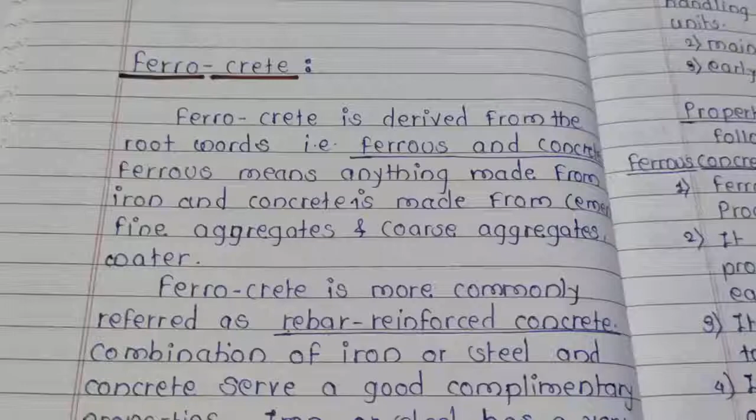Ferrocrete is derived from the root words ferrous and concrete. Ferrous means anything made from iron, and concrete is made from cement, fine aggregates, coarse aggregates and water.

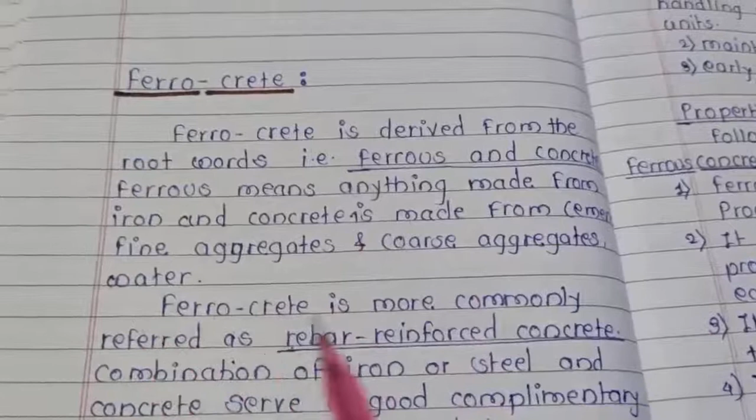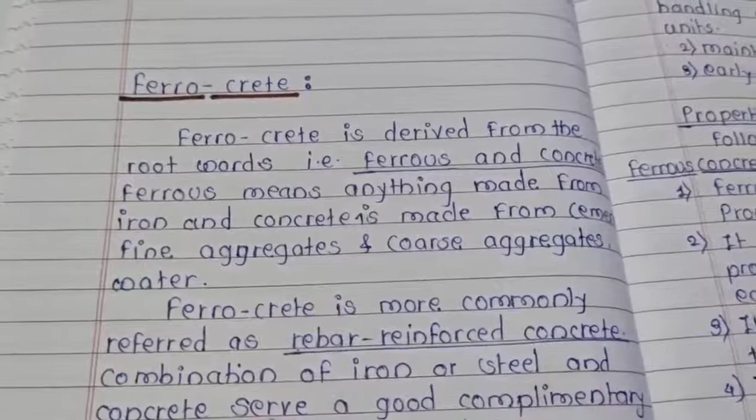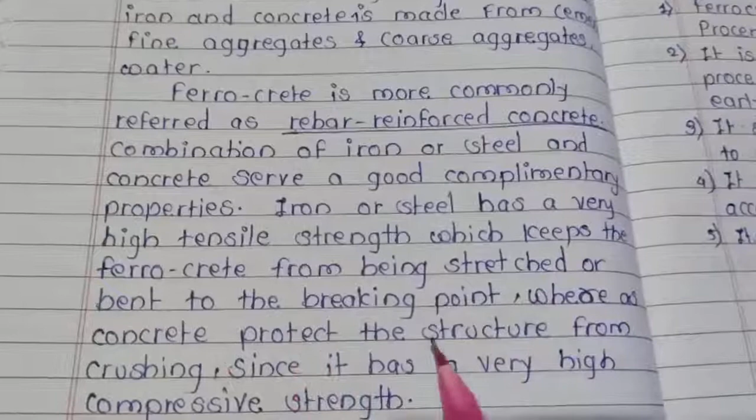Ferrocrete is more commonly referred to as rebar reinforced concrete. The combination of iron or steel and concrete serves good complementary properties. Iron or steel has a very high tensile strength, which keeps the ferrocrete from being stretched or bent to the breaking point, whereas concrete protects the structure from crushing since it has a very high compressive strength.

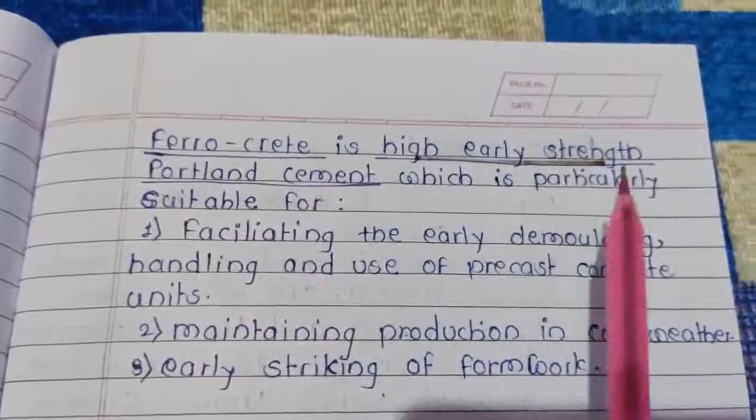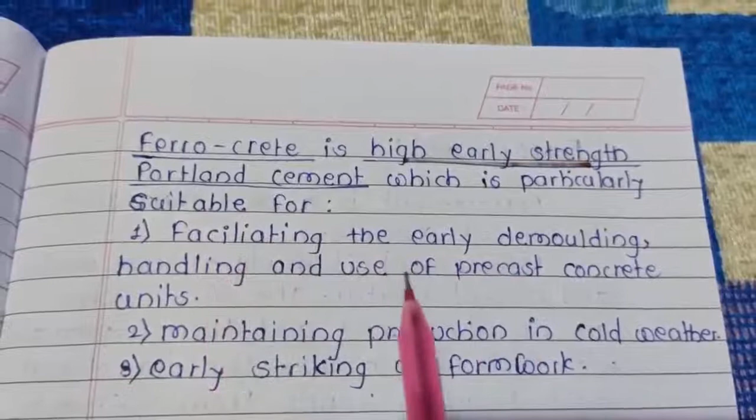Ferrocrete is high early strength Portland cement, which is particularly suitable for facilitating the early demolding, handling and use of precast concrete units, maintaining production in cold weather, and early striking of formwork.

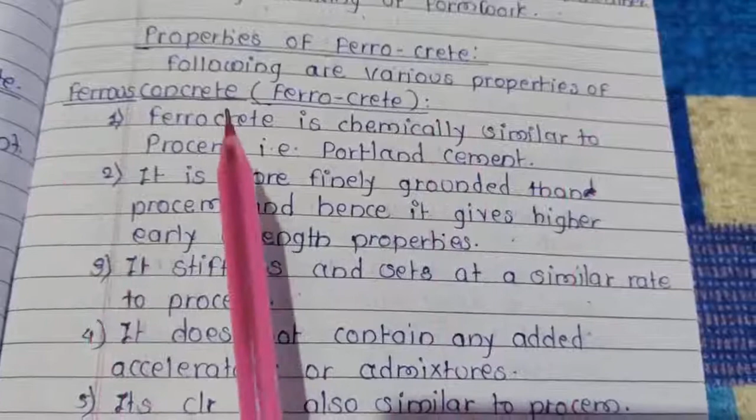Properties of ferrocrete. Following are various properties of ferrous concrete, meaning ferrocrete.

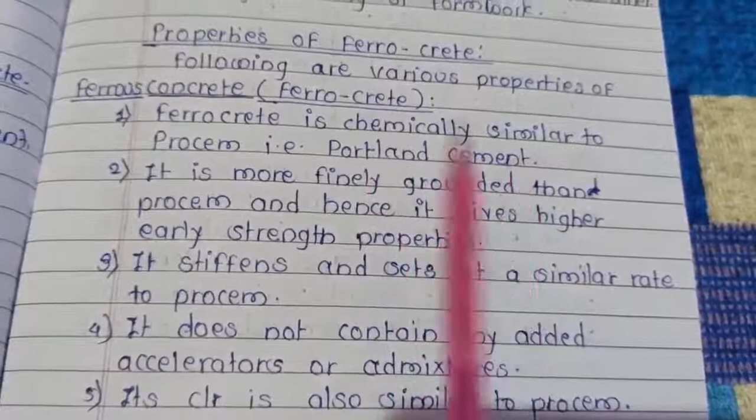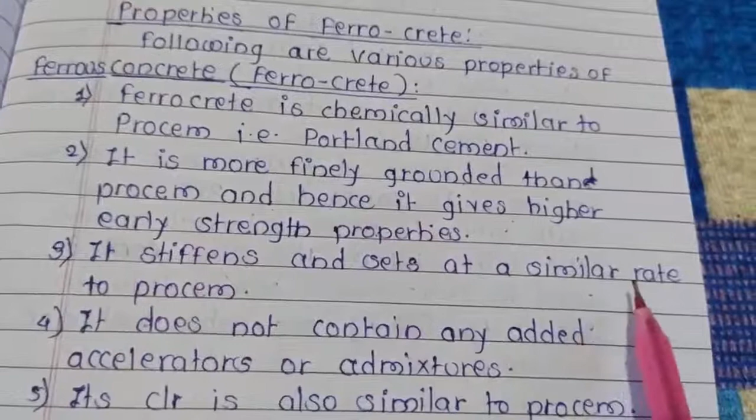Ferrocrete is chemically similar to Portland cement. It is more finely ground than Portland cement and hence gives higher early strength properties. It stiffens and sets at a similar rate to Portland cement. It does not contain any added accelerators or admixtures. Its color is also similar to Portland cement.

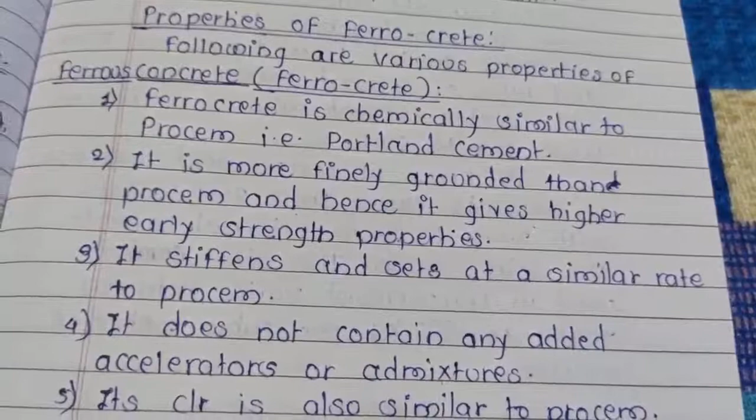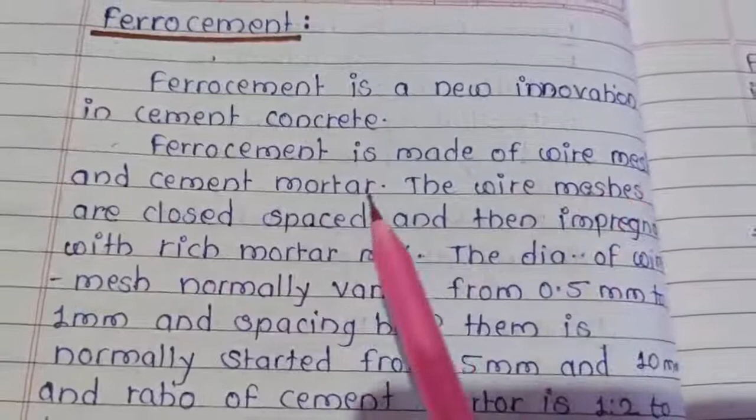Ferrocement is a new innovation in cement concrete. Ferrocement is made of wire meshes and cement mortar. The wire meshes are closely spaced and then impregnated with a rich mortar mix.

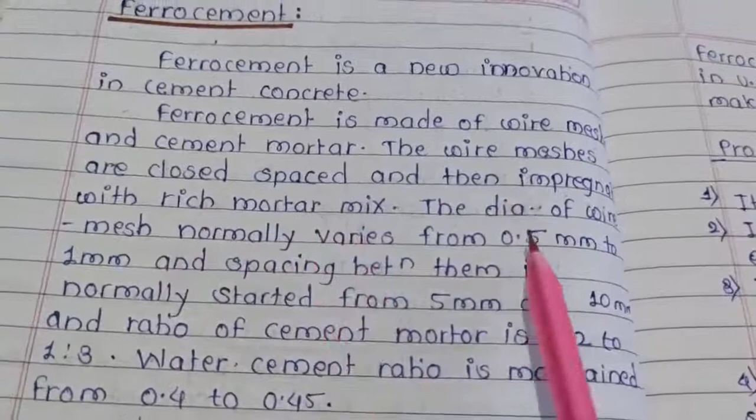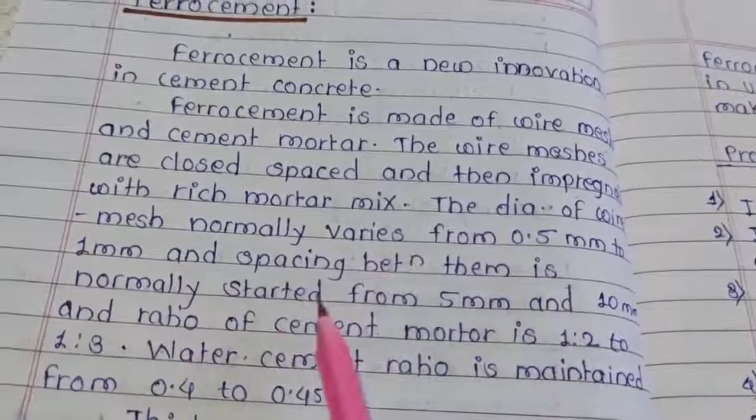The diameter of a wire mesh normally varies from 0.5 mm to 1 mm, and spacing between them normally starts from 5 mm to 10 mm. The ratio of cement mortar is 1:2 to 1:3. Water cement ratio is maintained from 0.4 to 0.45.

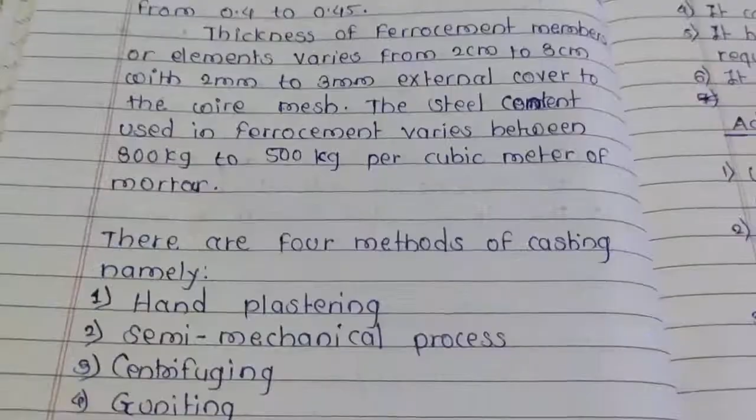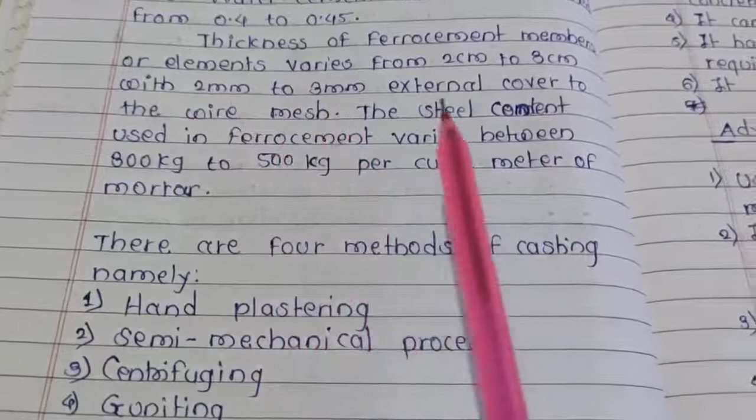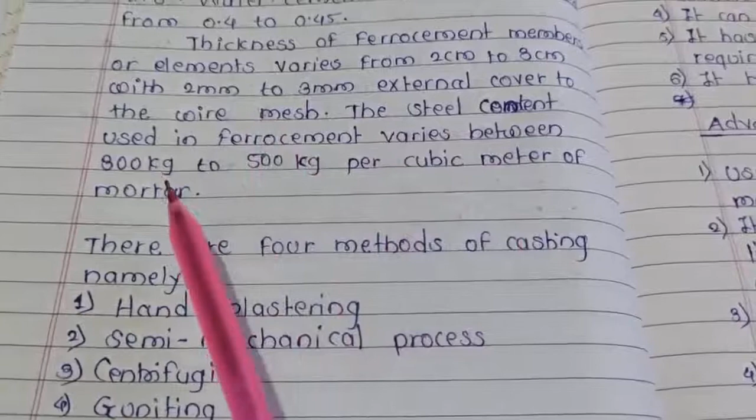Thickness of ferrocement members or elements varies from 2 cm to 3 cm, with 2 mm to 3 mm external cover to the wire mesh. The steel content used in ferrocement varies between 300 kg to 500 kg per cubic meter of mortar.

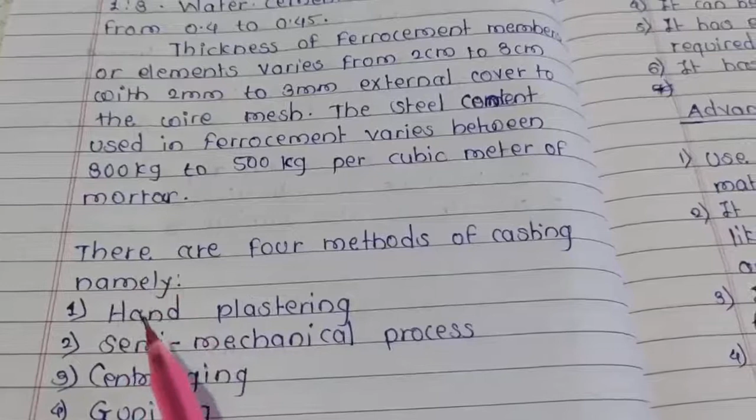There are 4 methods of casting, namely hand plastering, semi-mechanical process, centrifuging and guniting. Ferrocement is extensively preferred in US, UK and New Zealand for making boats.

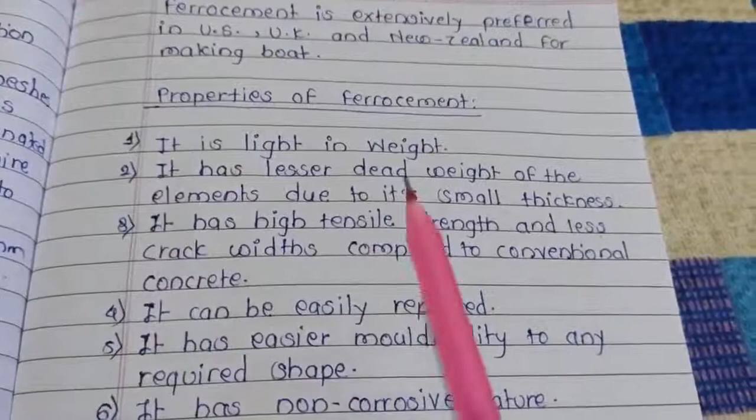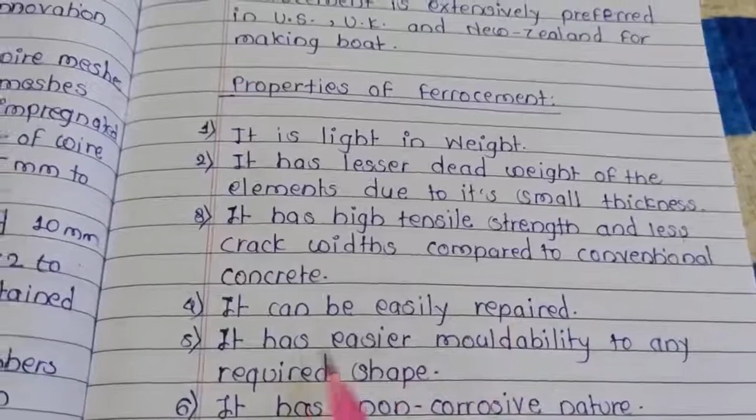Properties of ferrocement: it is light in weight, with lesser dead weight of the elements due to its small thickness. It has high tensile strength and less crack width compared to conventional concrete. It can be easily repaired, has easier moldability to any required shape, and has a non-corrosive nature.

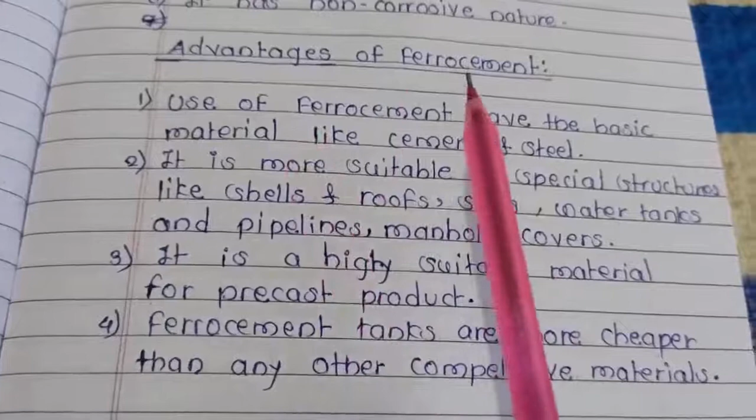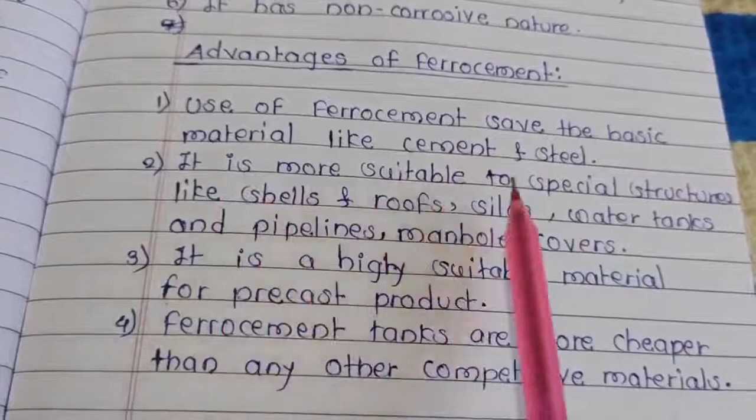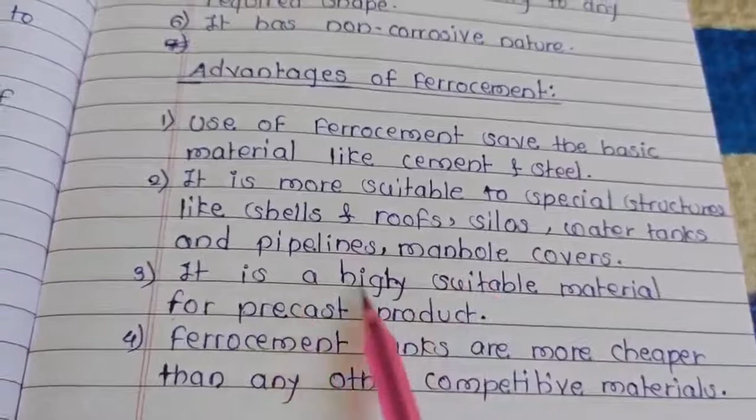Advantages of ferrocement: use of ferrocement saves basic material like cement and steel. It is more suitable for special structures like shells, roofs, silos, water tanks, pipelines and manhole covers. It is a highly suitable material for precast products. Ferrocement tanks are cheaper than any other competitive materials.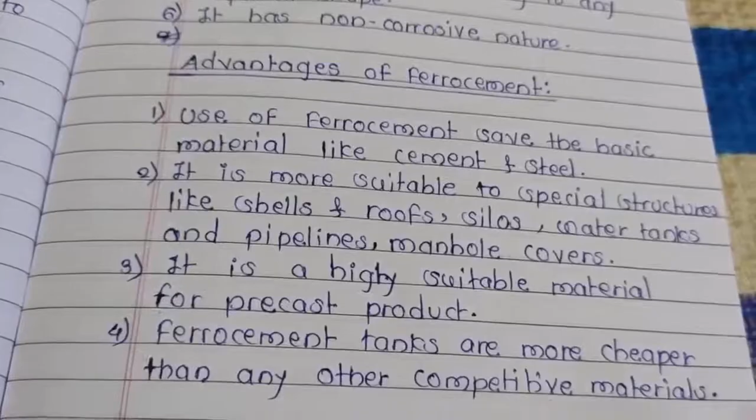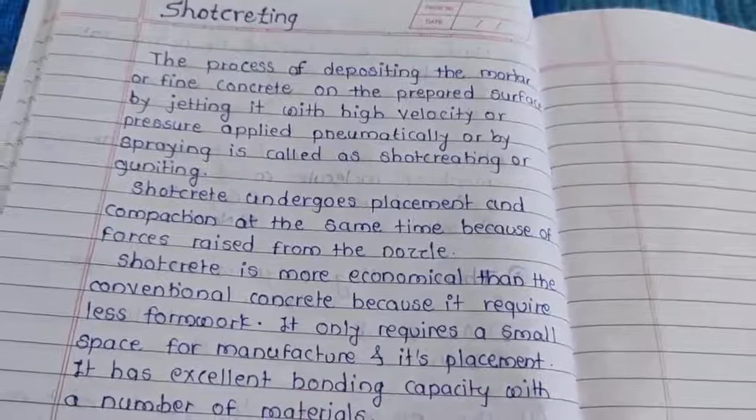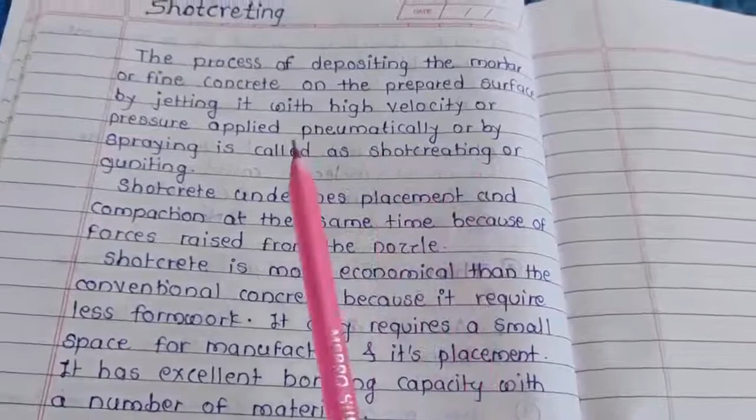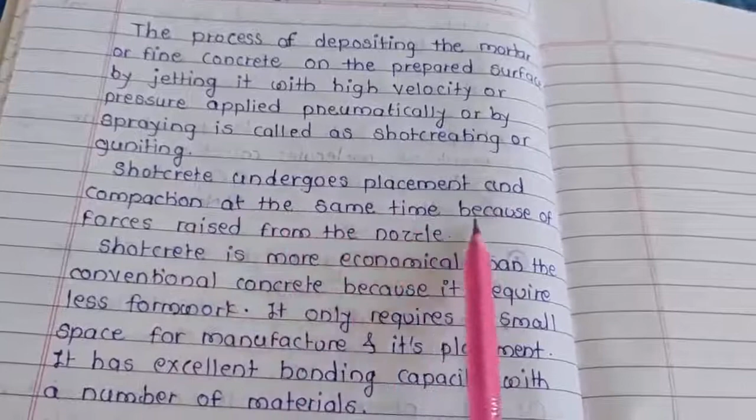Shotcreting. The process of depositing the mortar or fine concrete on the prepared surface by jetting it with high velocity or pressure applied pneumatically or by spraying is called shotcreting or guniting. Shotcrete undergoes placement and compaction at the same time because of the force created from the nozzle.

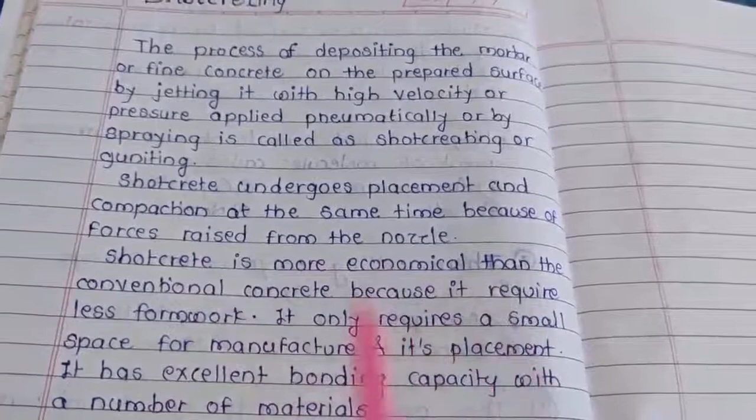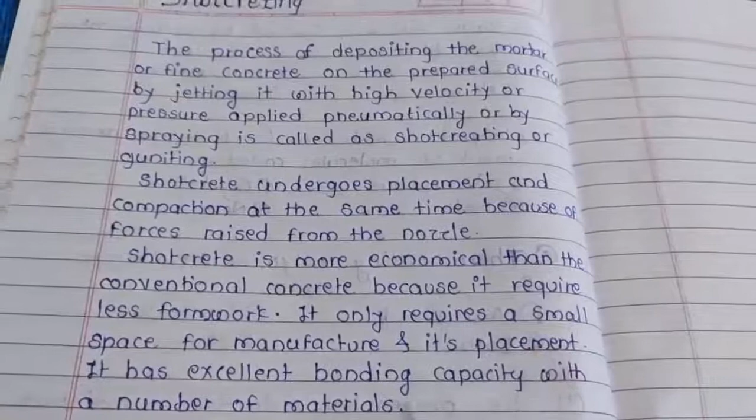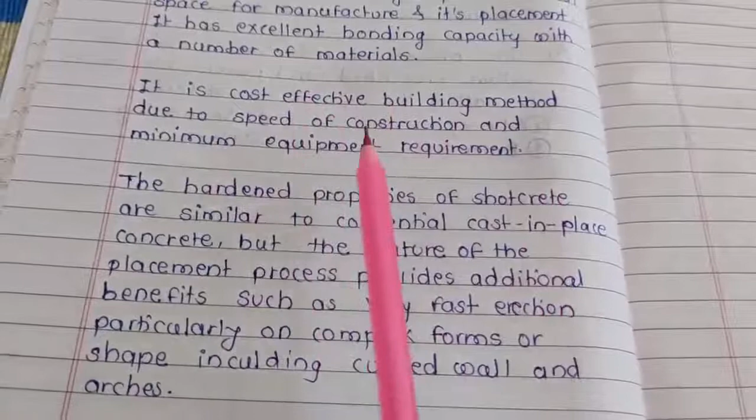Shotcrete is more economical than conventional concrete because it requires less formwork. It only requires a small space for manufacture and placement. It has excellent bonding capacity with a number of materials, and is a cost-effective building method due to speed of construction and minimum equipment requirement.

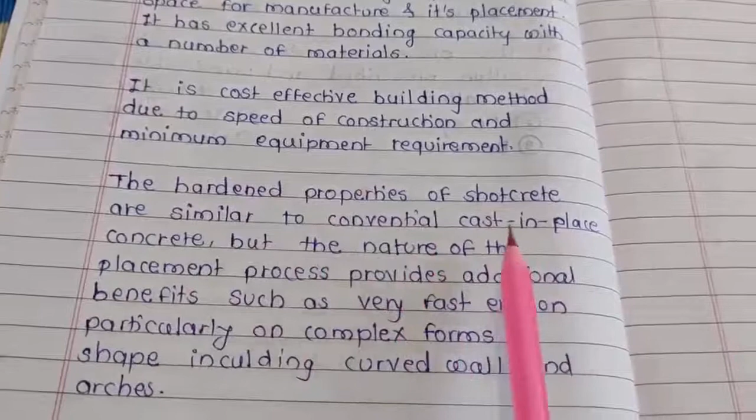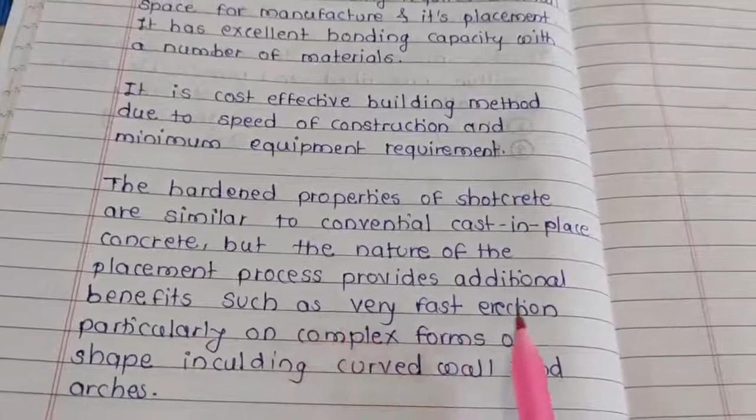The hardened properties of shotcrete are similar to conventional cast-in-place concrete. But the nature of the placement process provides additional benefits such as very fast erection, particularly on complex forms or shapes including curved walls and arches.